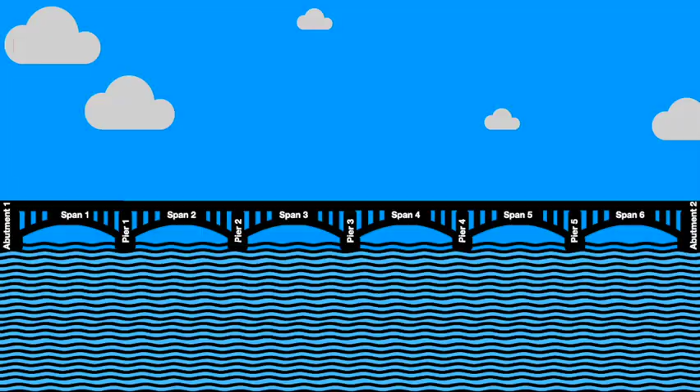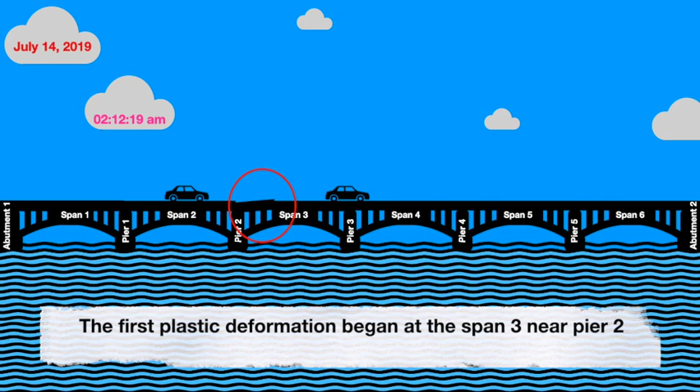At 2 hours 12 minutes 19 seconds in the early morning, the first sedan car reached Pier 3, while the car behind it was at the middle of span 2. The first plastic deformation began at span 3 near Pier 2. The deformation occurred at the circled location. The deck near Pier 2 sank slightly.

2 hours 12 minutes 20 seconds. The second plastic deformation started at the end of span 3 before Pier 3. It had become a non-statically indeterminate structure, loosely meaning the structure is stable but unpredictable. At that juncture, the second car reached the middle of span 3 while the front vehicle was passing the middle of span 4. The major plastic deformation occurred at the middle of span 3 due to the vehicle load, and the car started sinking along with span 3.

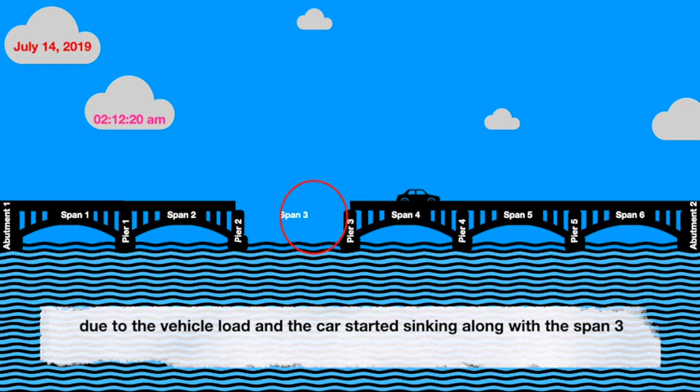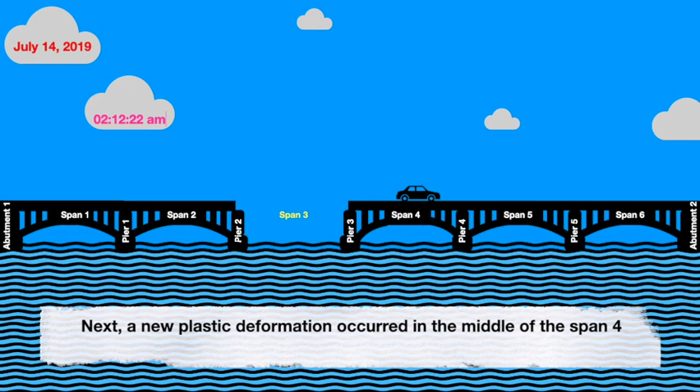At 2 hours 12 minutes 22 seconds, the story was not over yet. Next, a new plastic deformation occurred in the middle of span 4 due to the vehicle load, and Pier 3 had no support in the direction of span 3. In addition to sinking of the middle span, new plastic deformation appeared on both sides of span 4. Span 4 collapsed along with the car.

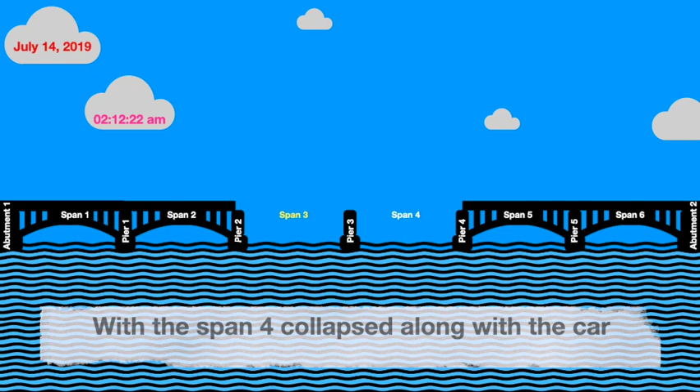At 2 hours 12 minutes 23 seconds, the Pier 3 column fell in the direction of span 3, notwithstanding the force from the falling span 4, and eventually crumbled into the water. What caused all this? Lack of maintenance? Yes and no. The major question is, why did the cracks appear in the bridge arches and what caused the bridge collapse? The answer is not the design, not the lack of maintenance.

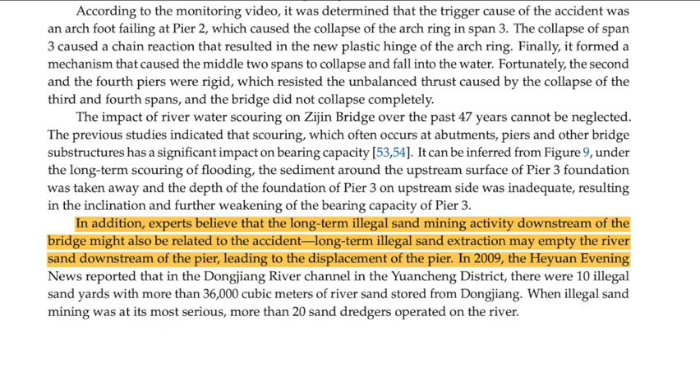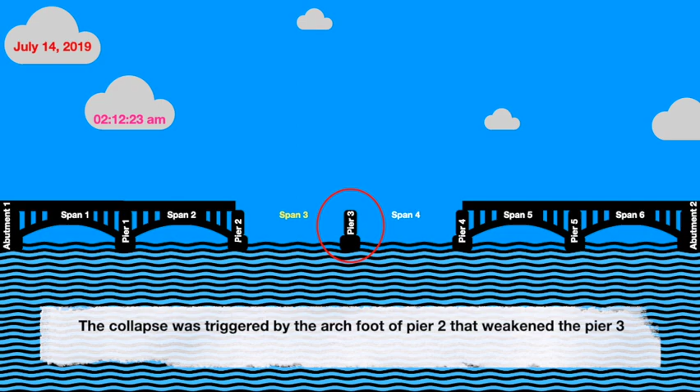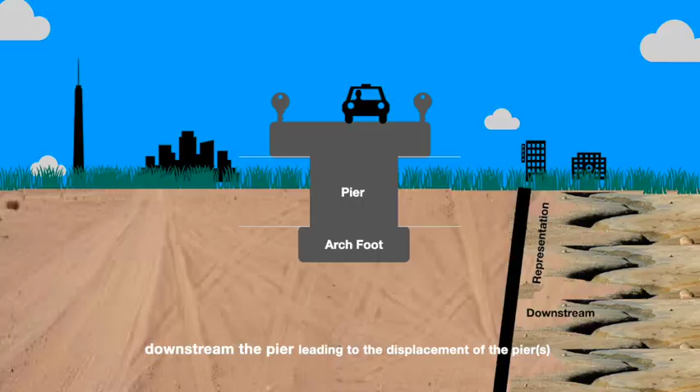According to the experts, it was not only due to poor maintenance but mainly due to illegal sand mining. The collapse was triggered by the arch foot of Pier 2 that weakened Pier 3. The weak Pier 3 initiated the chain reaction that pulled down spans 3 and 4. The long-term illegal sand extraction might have emptied the river sand downstream, leading to the displacement of piers. As a result, the piers started inclining over a period of time.

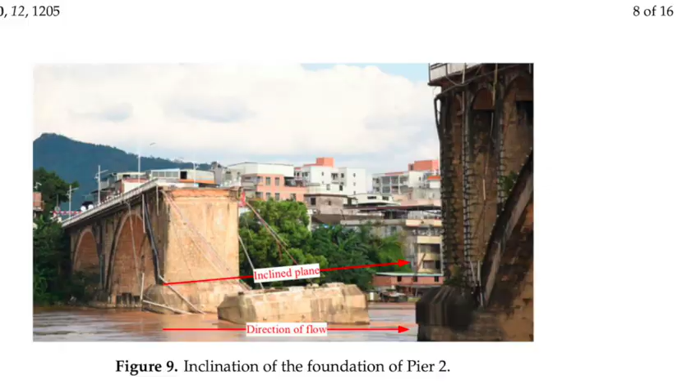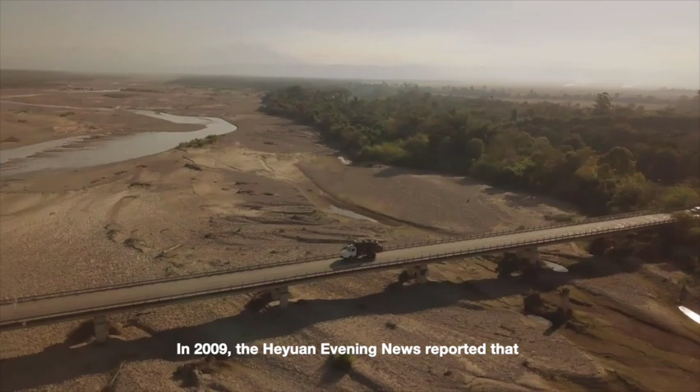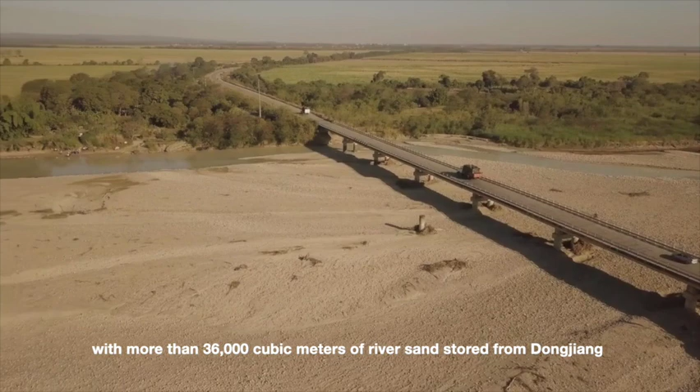As shown in the image, the inclination was at the right side of the traffic direction, and the first crack appeared on the same side that triggered the collapse of the bridge that should have stood proud for the next 50 years. In 2009, Heyuan Evening News reported that in the Dongjiang River, there were 10 illegal sand yards with more than 36,000 cubic meters of river sand stored from Dongjiang. When illegal sand mining was at its most serious, more than 20 sand dredgers operated on the river.

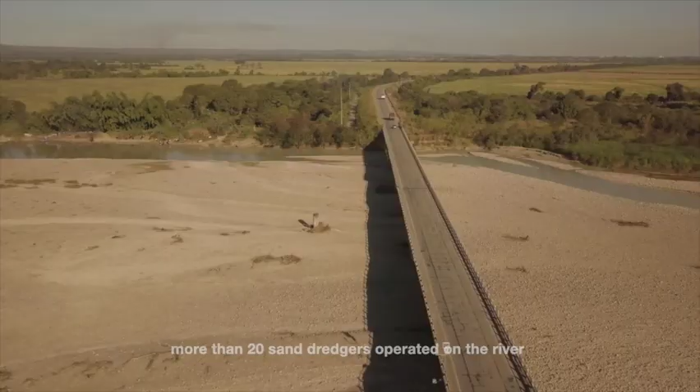The moral of the story: design failures can happen due to external factors that were not accounted for during the design phase. Hence, the design should be insensitive to external noises as far as possible.